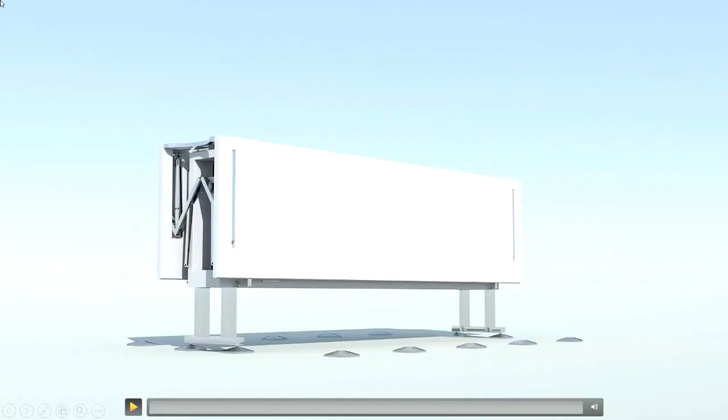Okay, so let's start with a couple of videos. Just watch this video.

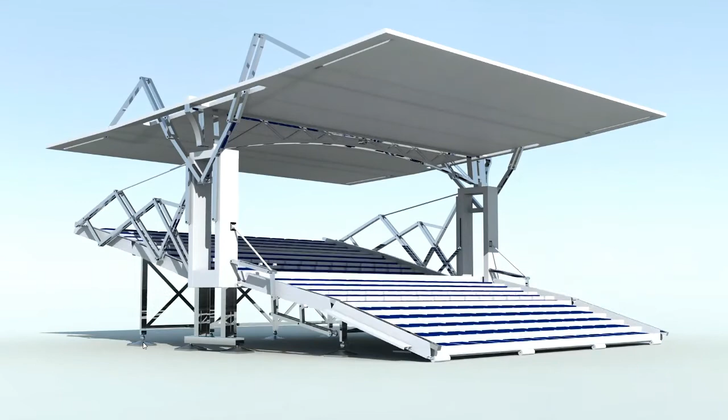Very interesting, isn't it? Just imagine a few years down the line, if Trinity College is hosting a sports event and we need a stadium, or the stadium infrastructure is needed, then probably we can rent this thing. This is how technology is evolving every day.

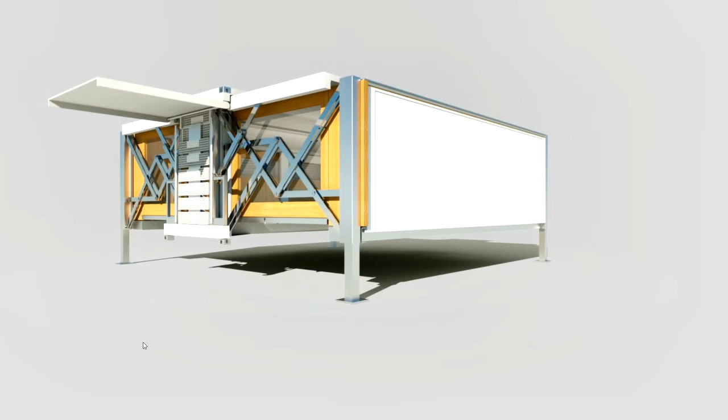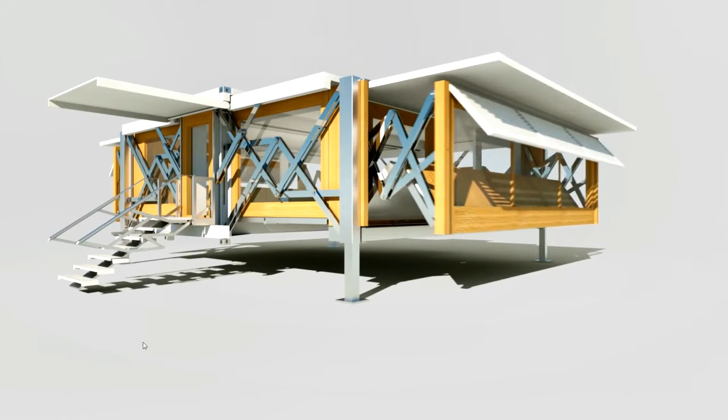So watch one more video, this is also an interesting one. See how it is unfolding, how various links and elements are unfolding, how a small structure turns into a big one. So a portable office, a portable building, a portable home. Very nice and interesting concept. Maybe the future of home is like this.

So I included one more video, but it is a lengthy video. But watch the video for a few seconds.

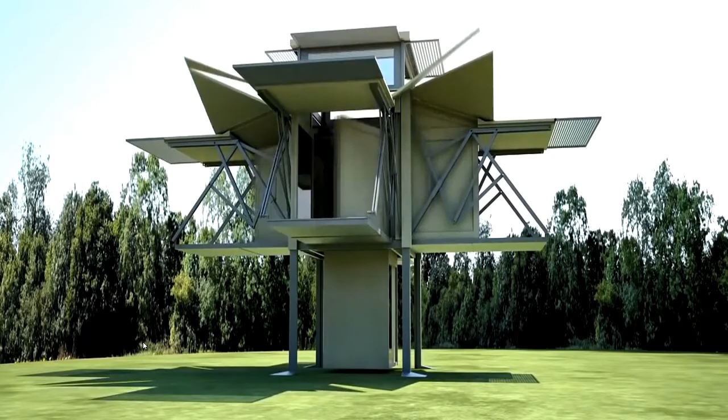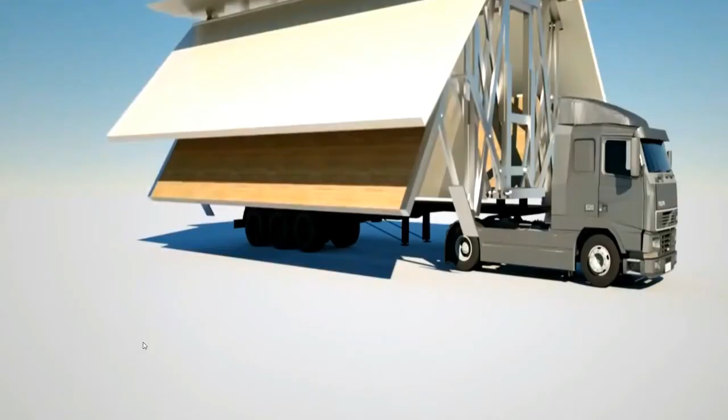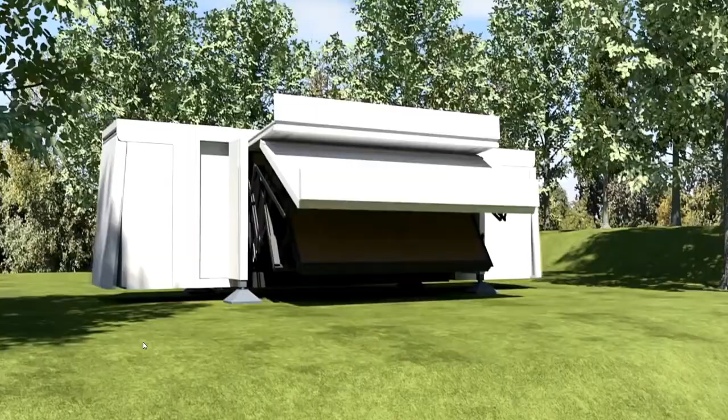If you search on YouTube for Ten Fold Engineering, you can see a lot of similar videos. The videos I included in this PowerPoint are mostly computer generated, but real practical videos are also available. Watch those practical videos and you can see how these things unfold and fold. Sorry, I didn't include that practical video, I included the computer generated ones only. You can also search 10-fold innovations, that will show you a lot of innovative videos. Anyway, let's stop this since it's repeating, let's move on with the subject.

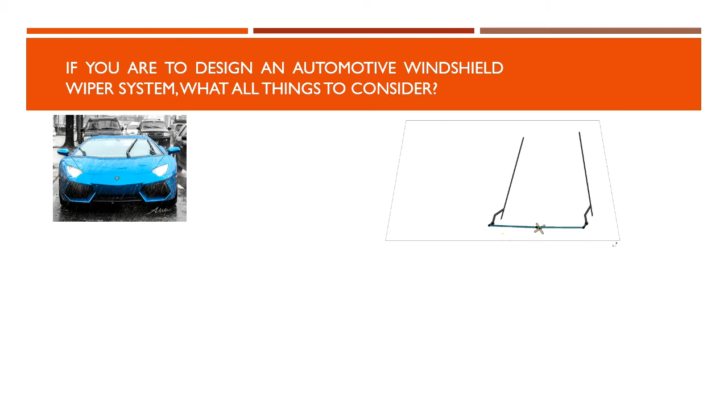Now assume you got a dream job at Ford company and need to design an automotive windshield wiper system. What are all the things you need to consider when designing a wiper system? It's simply a wiper, so this is the animation I included. Just imagine what you need to consider when designing a wiper system. The first and most important thing is the appropriate movement of the wipers.

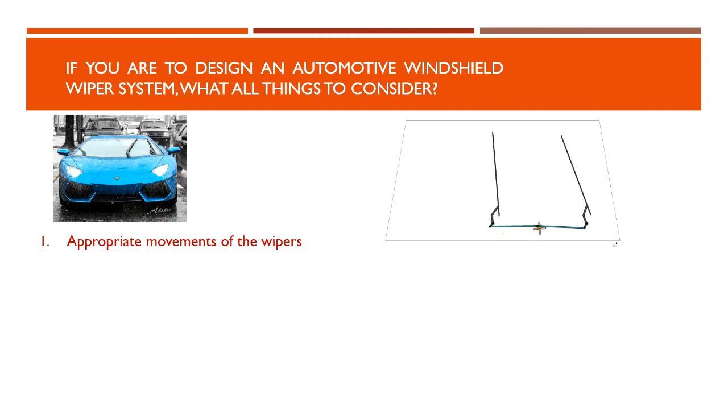Since this system is familiar to us, we can predict or imagine the real movement of the wiper. In this animation you can see the movement of the wiper. So the first and most important thing is to determine the appropriate movement of the wiper.

Another important thing is the driver and passenger side wipe angles. That's also important, you need to decide how much angle it needs to wipe. That depends on the design of the car, whether it's an aerodynamic design, and several other factors. So the wipe angle is very important.

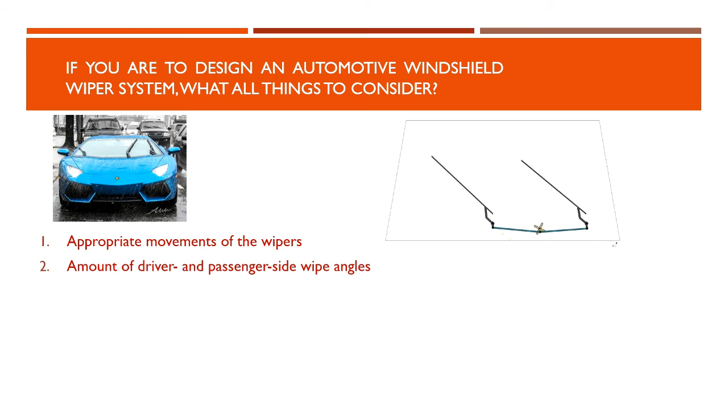The third thing is the location of the pivot. As you see in the animation, this is the pivot. The location of this pivot is very important, and you'll understand more after completing the upcoming sessions. And one more thing is the timing of the wipers, which you can also adjust, increasing or decreasing the timing. So these are just a very few things.

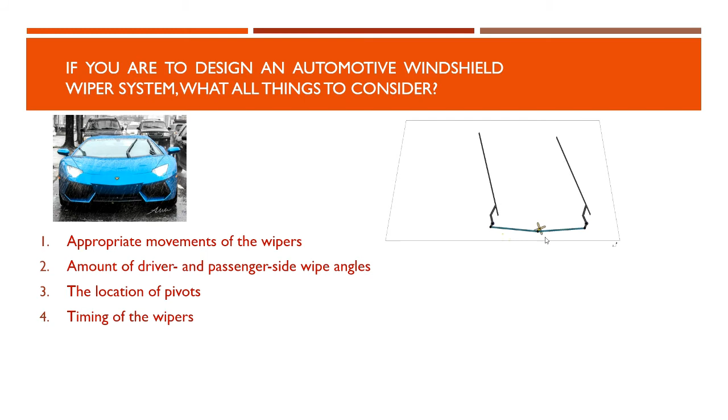There are many other things also you need to consider while designing an automotive wiper system, but these are the few things which you need to give prime importance. So for this wiper system, like most machines, understanding and analyzing the motion is very important to ensure the proper operation of this system.

Forces are an important factor, but in this thing I didn't include anything about the forces, the various forces acting on the system. Here I mentioned only about the movement of the wiper, that is the motion. I give prime importance to the motion. That is what you are going to study in this subject. These type of movements and the motion analysis are the focus of this subject.

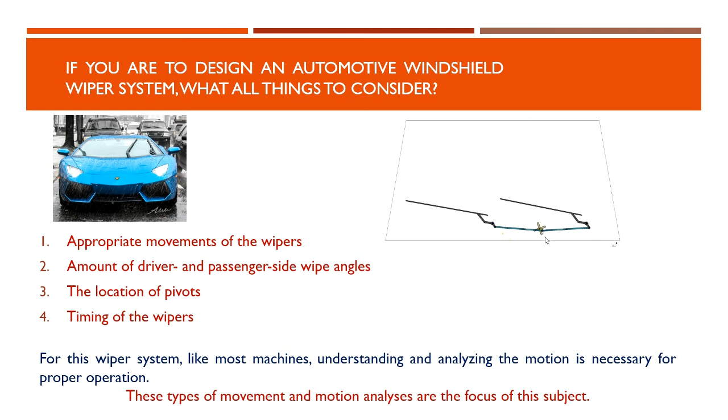Mechanics of machinery or the kinematics of machinery, this subject deals with the motion of the various systems. Understanding and analyzing the motion, designing the motion, analyzing the motion - these are the things which we will study in this subject.

Now I will give a small definition of the subject. The theory of machines and mechanism, another term for mechanics of machinery, is an applied science used to understand the relation between the geometry and motion of the parts of a machine or mechanism and the forces that produce this motion. The forces I include because considering this subject as a whole, you will study the motion as well as the forces. But in S5, the 5th semester, considering mechanics of machinery, you will concentrate only on the motion, not on the forces. The force part you will take care of in the 6th semester, dynamics of machinery. So this is the definition of the subject.

Before starting any course, the faculty needs to address three most important questions. First one is, what are the prerequisites for this course? You also imagine what will be the prerequisites for this course. Obviously, it is strength of materials and engineering mechanics.

One can also say that strength of materials is a totally different thing - there you are dealing mostly with static structures, and here movement is involved, motion is involved, that is, you are dealing with dynamic systems. But to a great extent, many of the basic concepts in strength of materials will be repeated in this course also. Similar will be the case with engineering mechanics - the free body diagram, the moment of inertia, some basic things will be repeated here. So the prerequisites for this course are strength of materials and engineering mechanics.